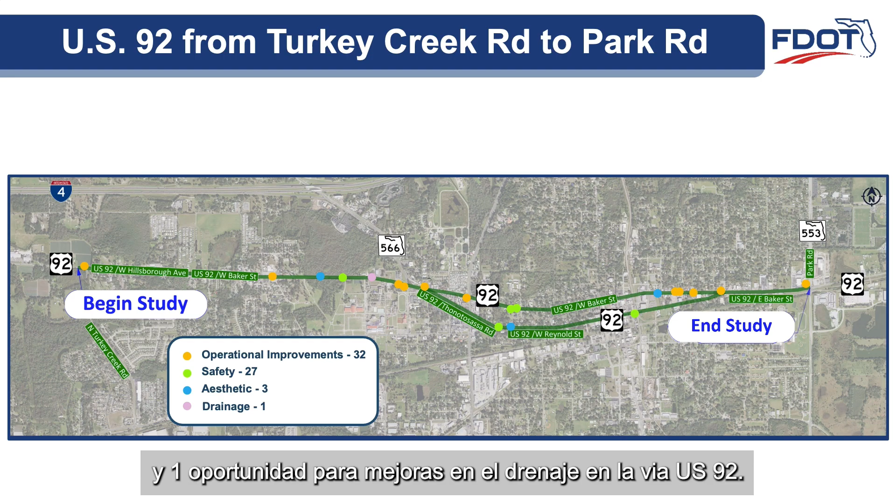The SR 39 study segment extends from SR 60 to East Alexander Street. This segment is approximately 3.5 miles in length. The feedback received at the previous community meeting included 9 opportunities for operational improvements, 9 opportunities for safety improvements, 1 opportunity for an aesthetic improvement, and 1 opportunity for a drainage improvement within this segment.

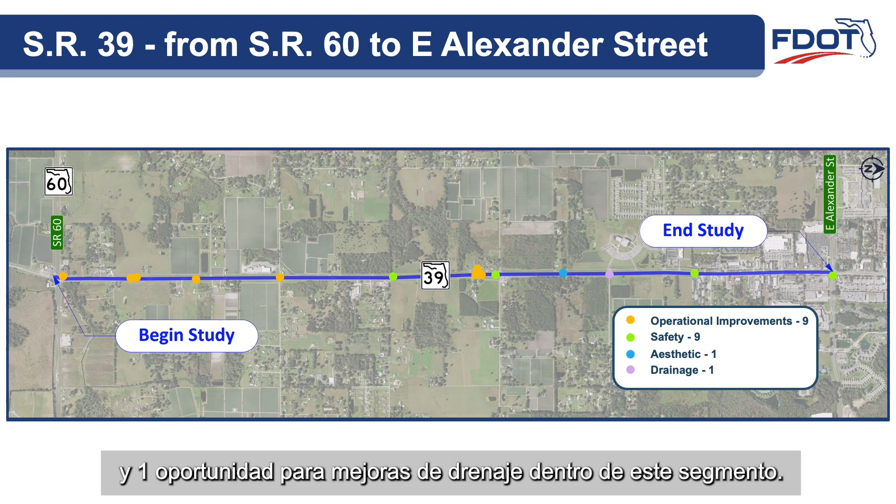The study team's technical analysis began with stakeholder coordination, where we engaged the community to gain insight about local conditions. Next, we gathered data and evaluated the existing characteristics of the corridor. In addition, we performed field reviews and analyzed crash data to determine possible safety trends.

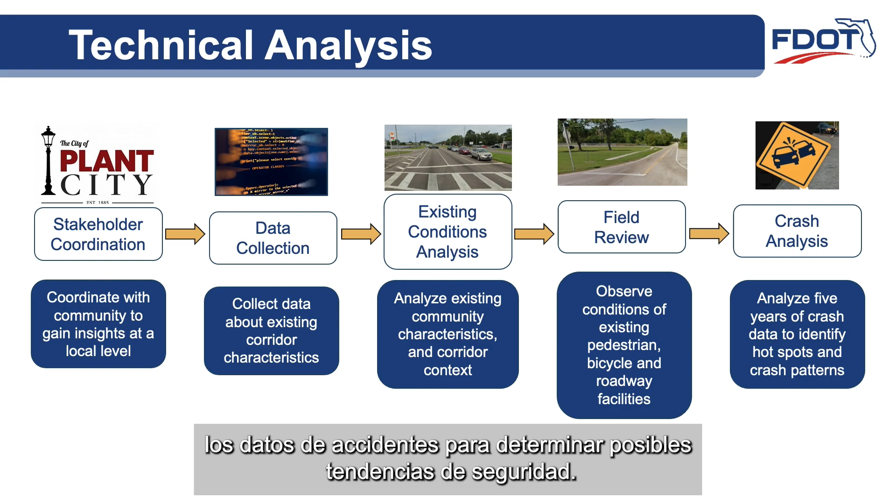Based on the feedback given and a technical analysis of US 92 from Turkey Creek Road to Ritter Street, the potential improvements include: further coordination and analysis will be necessary to explore the addition of a left turn lane on Turkey Creek Road to turn onto US 92.

Adding a bike lane or buffered bike lane to improve safety by at least 30%, according to the Federal Highway Administration, FHWA. Adding a turn lane near Parkesdale Farm Market to improve the flow of traffic. Further coordination will be needed to identify the exact location of the turn lane.

If warranted, adding a signal with pedestrian crosswalks at Whitehurst Street and Walter Drive. Installing sidewalk where applicable to provide better connectivity and improve pedestrian mobility.

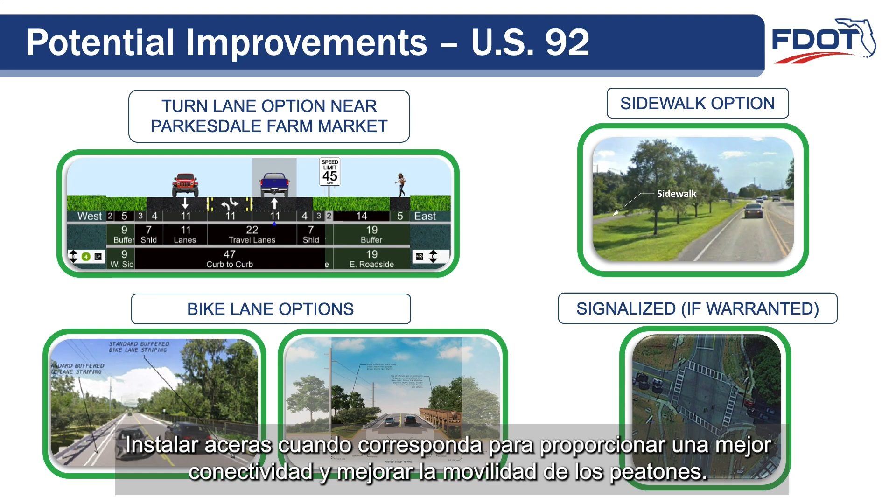Continuing along the US 92 corridor from Ritter Street to North Alexander Street, the potential improvements include: installing sidewalk to provide better connectivity and improve pedestrian mobility within the corridor. Adding a bike lane or a buffered bike lane option.

On Thonotosassa Road to turn on US 92, 2 options are available to address the safety and traffic concerns from the previous community meeting. The first option would be to add a right turn only lane while maintaining the current protected bike lane, then updating the middle lane to be a through left turn lane.

The far left turn lane would remain the same. This option would have right-of-way and drainage impacts. The second option would be to have 2 left turn only lanes and add a through right turn lane. This would require the realignment of the intersections and right turn islands for traffic turning onto Thonotosassa Road from US 92.

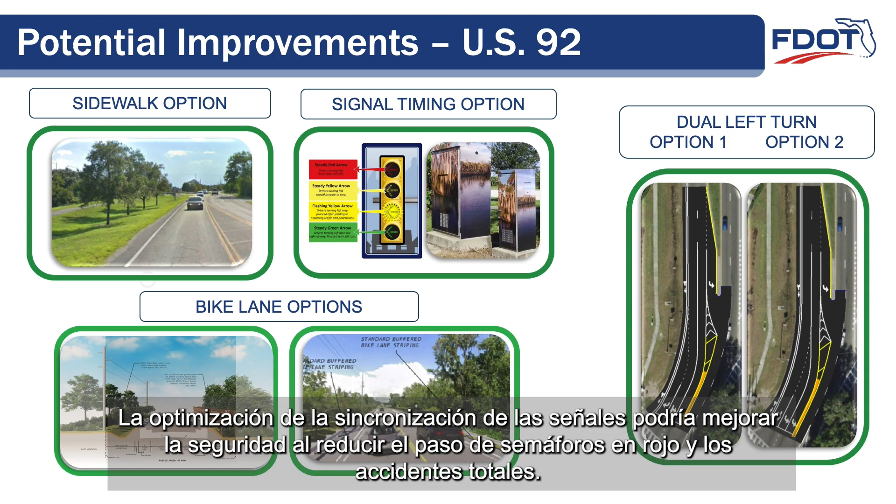Upgrade signal timing on North Alexander Street at West Baker Street and at Thonotosassa Road to improve safety and the current flow of traffic. Signal timing optimization could improve safety by reducing red light running and total crashes.

From North Alexander Street to North Palmer Street, the potential improvements include installing ornate street lighting through residential areas, cast a lower illumination footprint, and the Federal Highway Administration states that lighting can reduce crashes up to 42%. A lighting justification study will need to be conducted for lighting improvements.

Adding a 5-foot bike lane with a 2-foot buffer on West Baker Street from the railroad crossing just before Palmer Street to Whitehall Street, and on West Reynolds Street from North Thomas Street to North George Street. The buffered bike lane option would require reconstruction of the current curb, which would impact drainage and underground utilities. The cost-benefit ratio for this option would need to be reviewed.

Installing speed tables on West Baker Street before Davis Street and on West Reynolds Street after Davis Street to improve safety by mitigating speeding within this section. Speed tables and raised intersections may be considered only for target speeds of 30 miles per hour or less.

Installing stamped crosswalks on the West Reynolds Street and North Howard Street intersection for better aesthetics and improved visibility. This improvement may require coordination with local municipality.

Constructing new curb ramp and crosswalk to improve sight distance and pedestrian safety where needed. Adding a shared use path option would improve safety and mobility along the corridor by providing a pedestrian and bicycle facility away from the vehicular traffic. Pedestrian ramps and crosswalks would be upgraded during the installation.

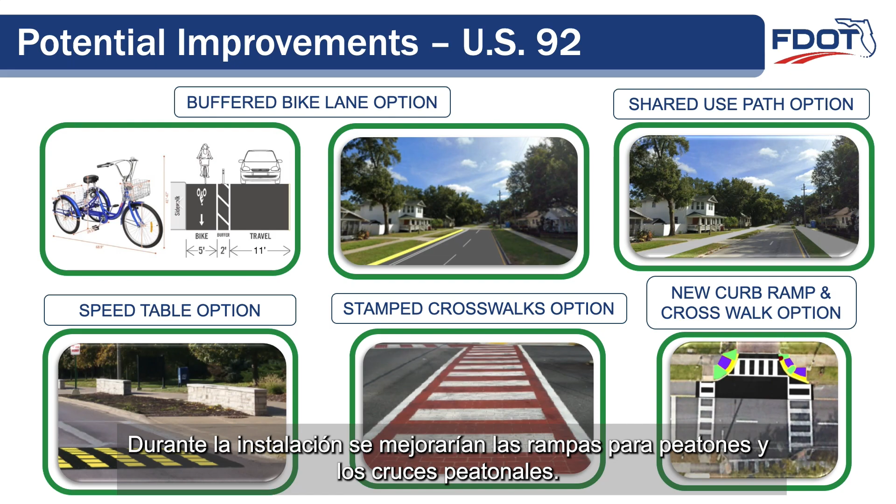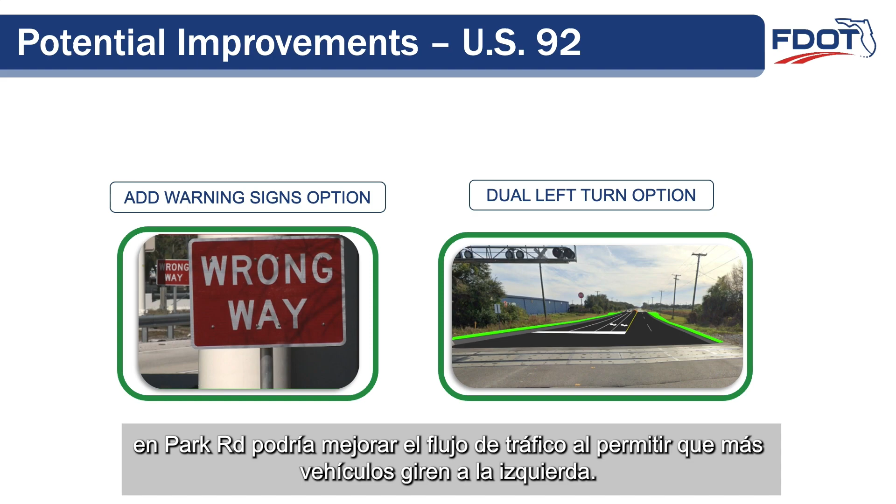From North Palmer Street to Park Road, other potential improvements include installing wrong way warning signs to reduce wrong way driving along the one-way pair. Adding a left turn lane to provide a dual left turn option at Park Road could improve the flow of traffic and reduce congestion.

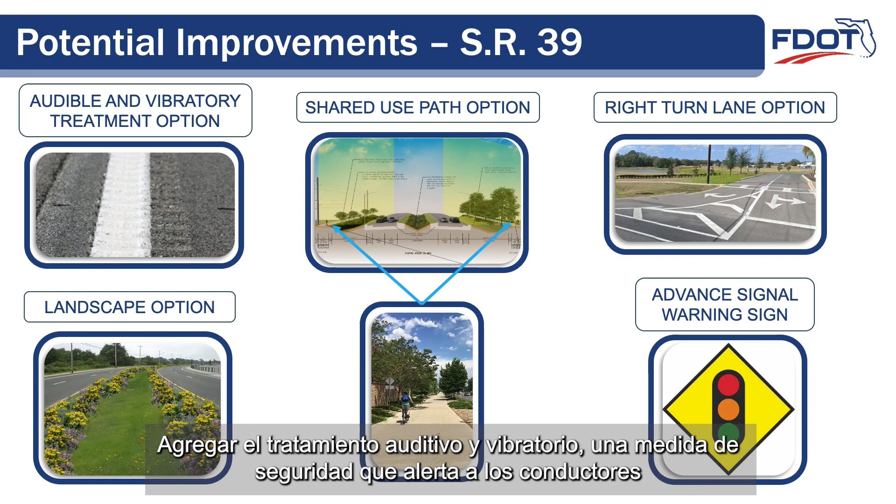Based on the feedback given and a technical analysis of the SR 39 corridor from SR 60 to Colston Road Holloway Road, potential improvements include adding auditory and vibratory treatment, a safety measure that alerts drivers of potential run-off-the-road occurrences to improve safety by alerting inattentive drivers.

Adding a shared-use path option would improve safety and mobility along the corridor by providing a pedestrian and bicycle facility away from the vehicular traffic. Pedestrian ramps and crosswalks would be upgraded during the installation.

Landscape options along the shared-use path will require further review to ensure safety requirements are met. Landscaping opportunities along the medians will require coordination with the local municipality.

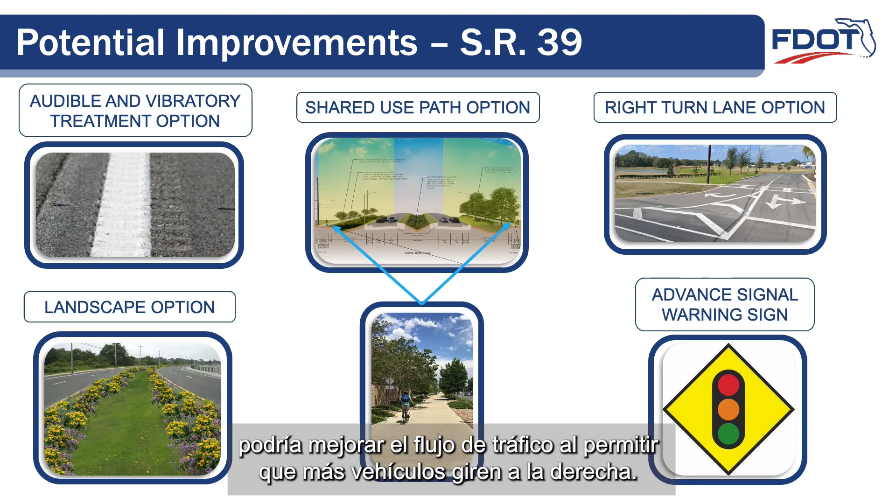Adding an advance signal warning sign to improve safety south of Holloway and Colston Road. A review of signal timing throughout the corridor can be reviewed for opportunities of improvement. Adding one right turn lane option at Holloway Road could improve traffic flow by allowing more vehicles to turn right.

For the SR 39 corridor, Colston Road Holloway to Trapnell Road, potential improvements include adding auditory and vibratory treatment option, a safety measure that alerts drivers of potential run-off-the-road occurrences to improve safety by alerting inattentive drivers.

Adding shared use path option to improve safety and mobility along the corridor by providing a pedestrian and bicycle facility away from the vehicular traffic. Pedestrian ramps and crosswalks would be upgraded during the installation. Landscape options along the shared use path will require further review to ensure clear zone and safety requirements are met.

Adding one right turn lane at West Trapnell Road onto SR 39 heading southbound to reduce traffic congestion. This option is dependent on further review of right-of-way.

Signal timing modification options on West Trapnell Road to improve the current flow of traffic by making existing traffic signal control systems operate more efficiently. The Federal Highway Administration states that signal timing optimization could improve safety by reducing between 36% to 50% of red light running, 8% to 12% of total crashes, and 12% of injury crashes.

The community feedback noted safety concerns about through trucks using Trapnell Road, not pictured. Further coordination with the local municipality is needed to add no truck signs on local roads.

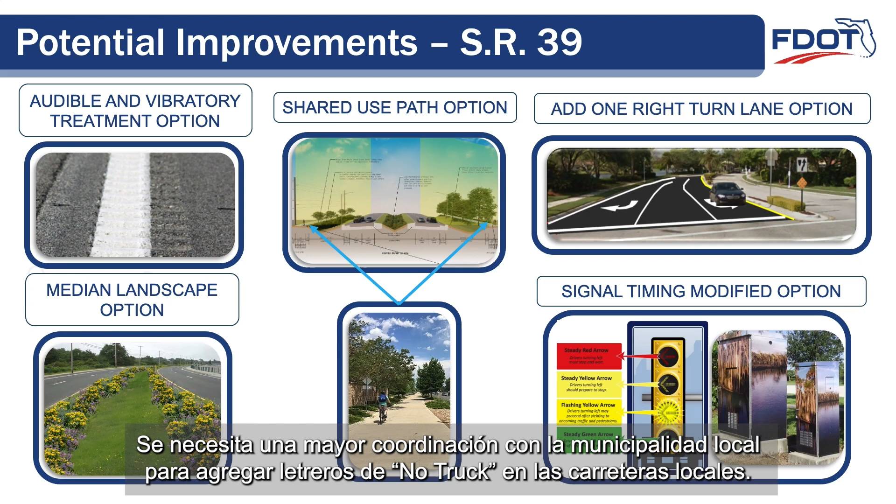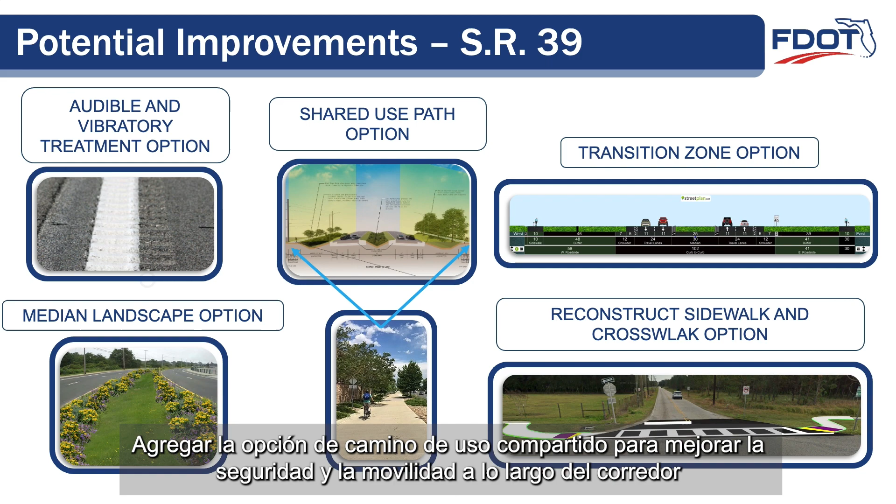From Trapnell Road to Alexander Street, adding auditory and vibratory treatment option, a safety measure that alerts drivers of potential run-off-the-road occurrences to improve safety by alerting inattentive drivers. Adding a shared use path option would improve safety and mobility along the corridor by providing a pedestrian and bicycle facility away from the vehicular traffic.

Pedestrian ramps and crosswalks would be upgraded during the installation. Landscape options along the shared use path will require further review to ensure safety requirements are met.

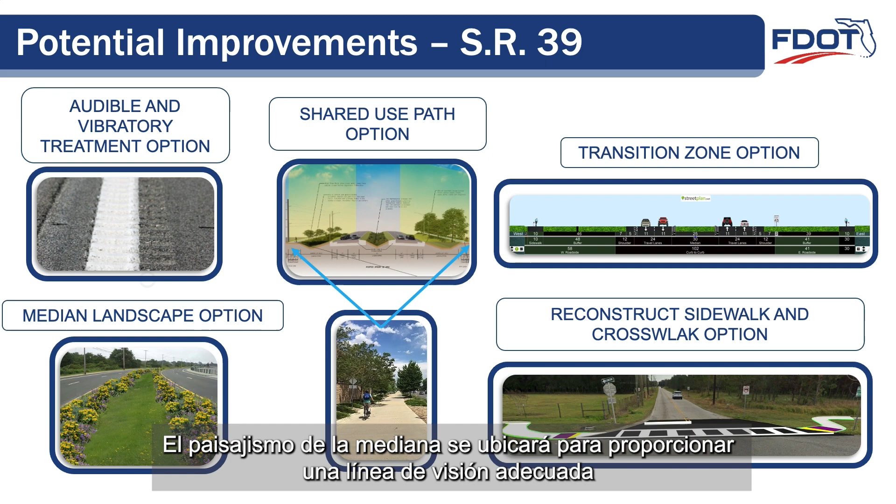Adding a transition zone option from Johnson Road to Charlie Griffin Road by reducing the lane width from 12 feet to 11 feet, signal speed changes along the corridor to users. The median landscaping will be located to provide adequate line of sight, and coordination with the local municipality on maintenance will be needed.

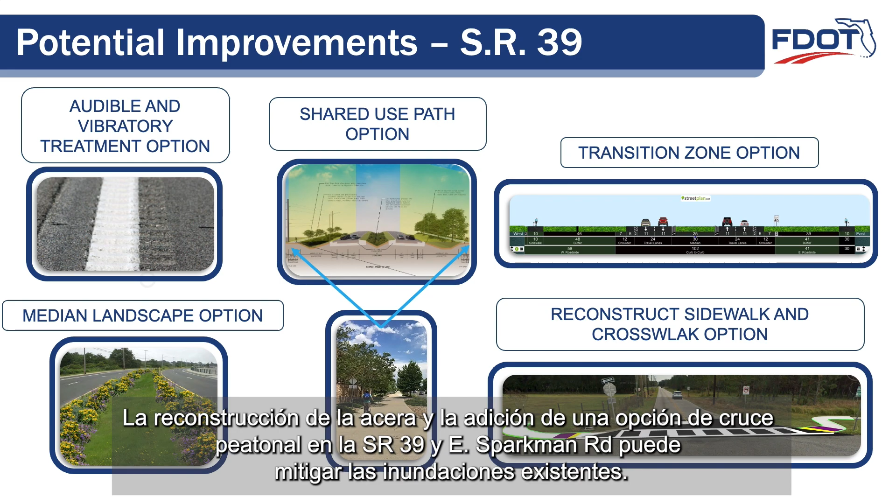Reconstructing the sidewalk and adding a crosswalk option at SR 39 and East Sparkman Road can mitigate existing flooding.

From Trapnell Road to Alexander Street, landscaping opportunities along the medians will require coordination with the local municipality. Adding a shared use path option would improve safety and mobility along the corridor by providing a pedestrian and bicycle facility away from the vehicular traffic. Pedestrian ramps and crosswalks would be upgraded during the installation.

Landscape options along the shared use path will require further review to ensure safety requirements are met. Signal timing modification options on the entrance to Lowe's to improve the current flow of traffic by making existing traffic signal control systems operate more efficiently. Signal timing optimization could improve safety by reducing red light running and total crashes.